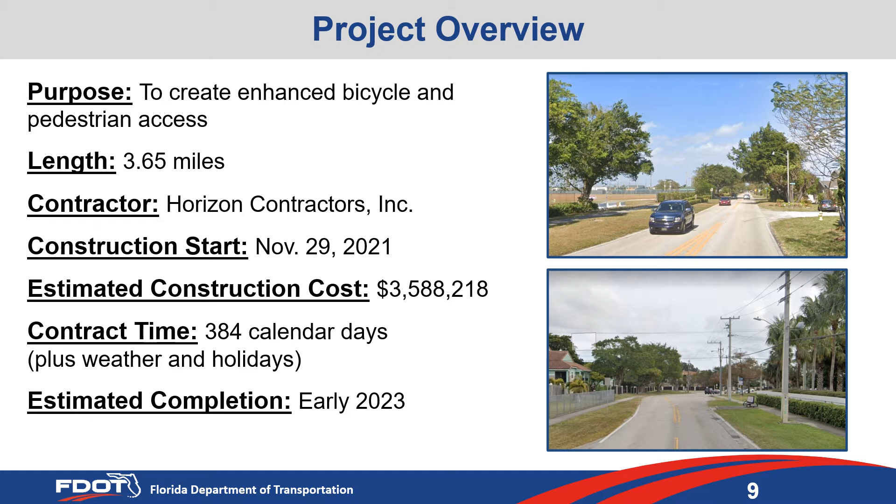Slide 10. Good evening, everyone. My name is Fazil Qureshi from the Broward MPO. I'm the Mobility Projects Manager.

First, I'm going to start off with who the Broward MPO is. We are a federally chartered entity responsible for transportation decision-making in the Broward region. We help influence the expenditure of federal and state transportation funds at the regional level. We are governed by our MPO board, which consists of 31 elected officials from 31 municipalities, from Broward County School Board, and the South Florida Regional Transportation Authority, also known as Tri-Rail.

We help ensure that plans are developed, we conduct studies, we establish initiatives and programs. Our vision is to collaboratively plan, prioritize, and fund the delivery of diverse transportation options, ensuring our work will have measurable positive impact by ensuring transportation projects are well selected, funded, and delivered.

Slide 11. Now, many of you may be wondering, where did this project originate from? This project actually came out of the Broward MPO's Hollywood and Pines Boulevard Congestion Management and Livability Planning Study. The study was completed in December of 2013.

The study was a half-mile wide corridor centered around Hollywood Pines Boulevard from US 27 on the western end to State Road A1A on the eastern end.

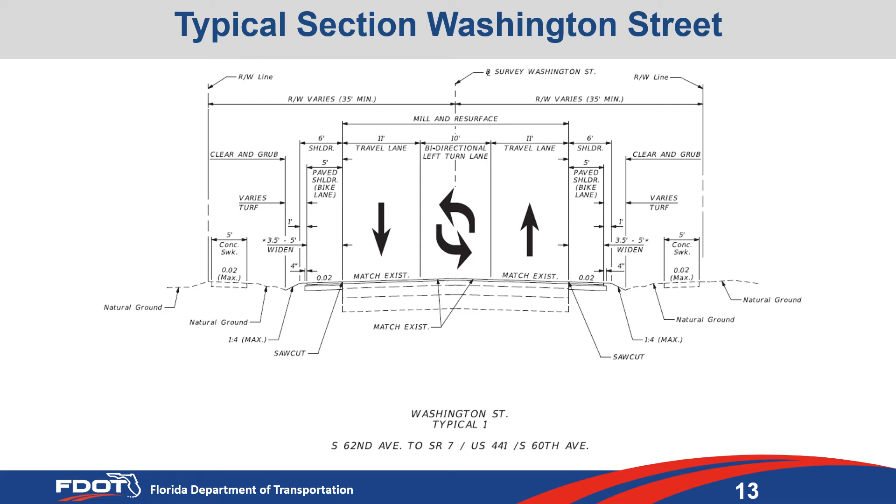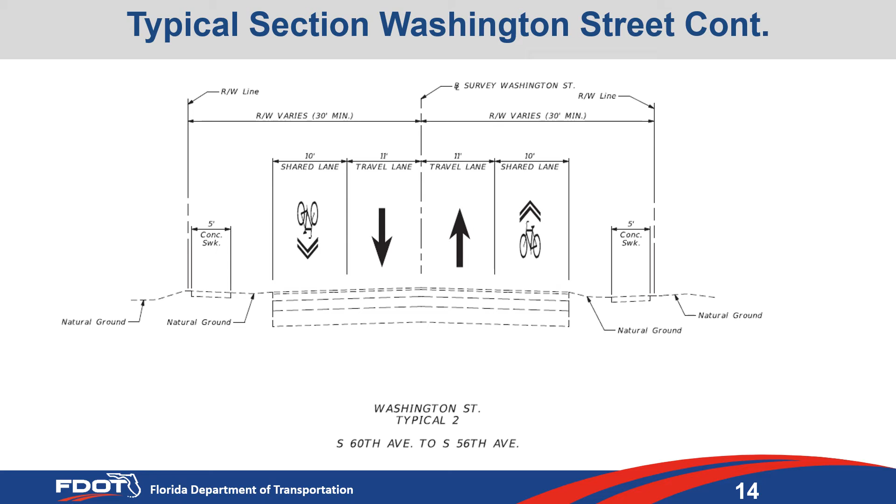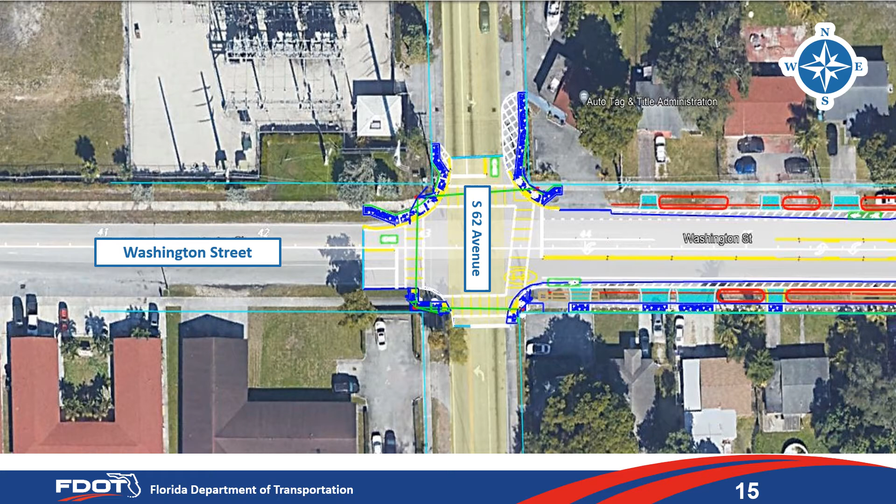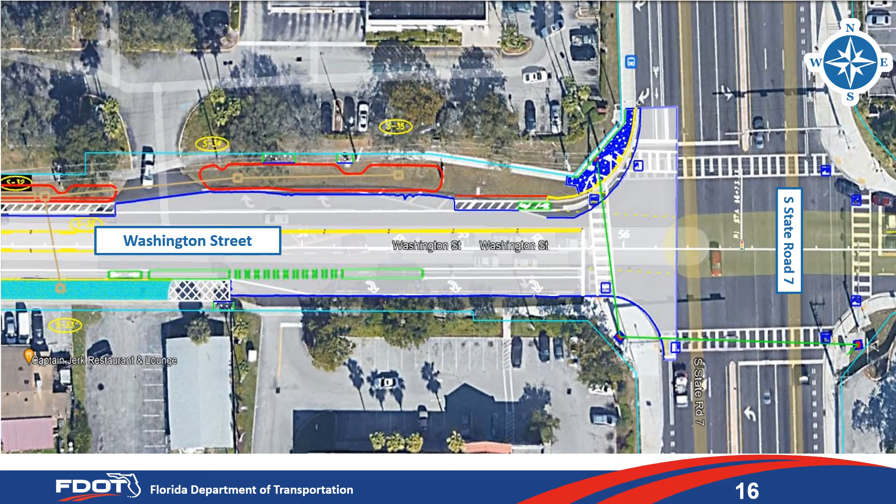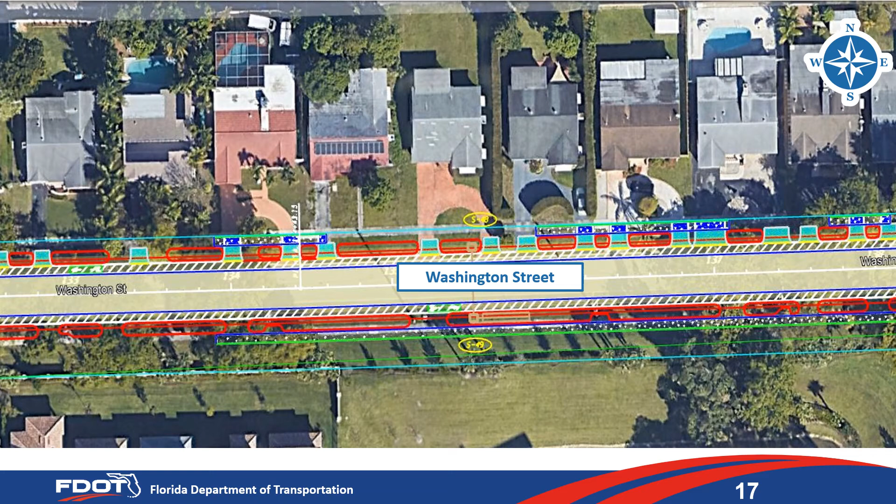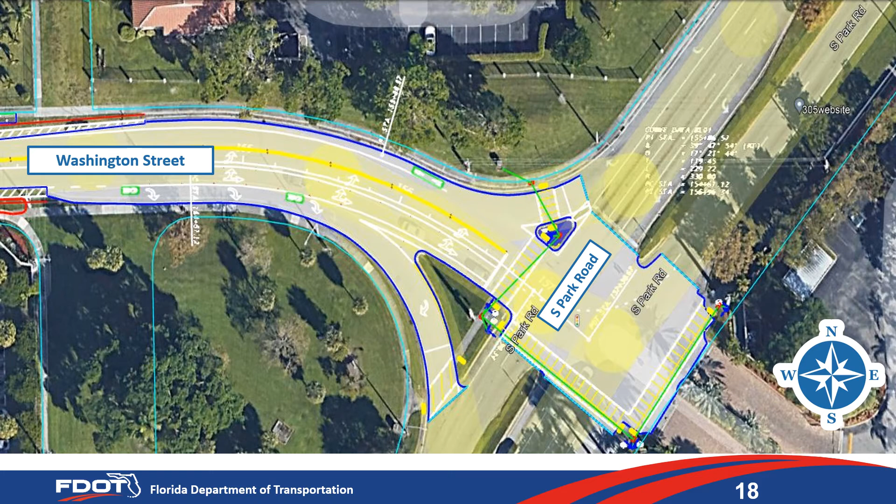Again, here you can see some of the striping that will be done after the milling and resurfacing at this intersection, as well as some pedestrian signal upgrades.

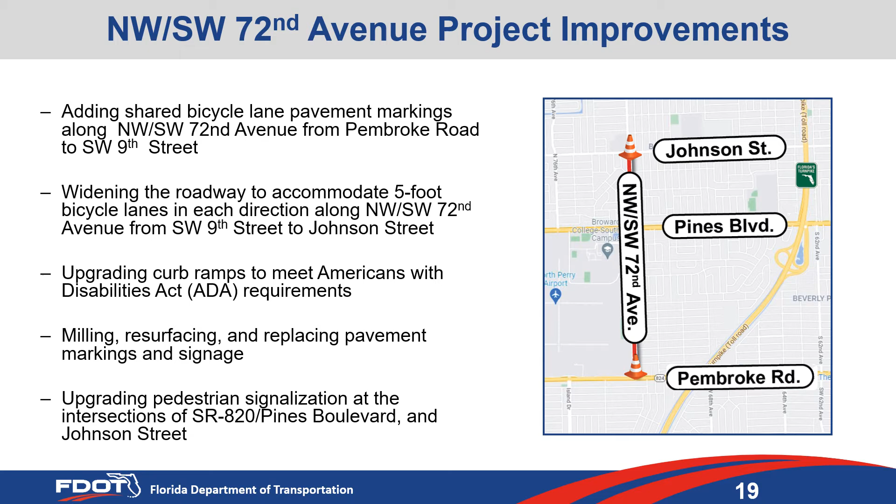Slide 20. This is the typical section of 72nd Avenue between Pembroke Road and Southwest 9th Street. We will be placing shared bicycle lane markings along this segment of the road, as it is anticipated to be reconstructed in the near future by Broward County Water and Sewer Department.

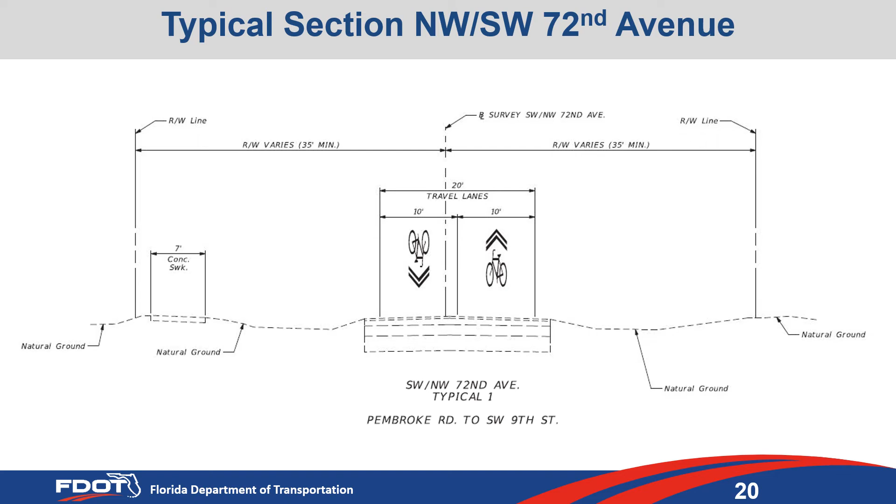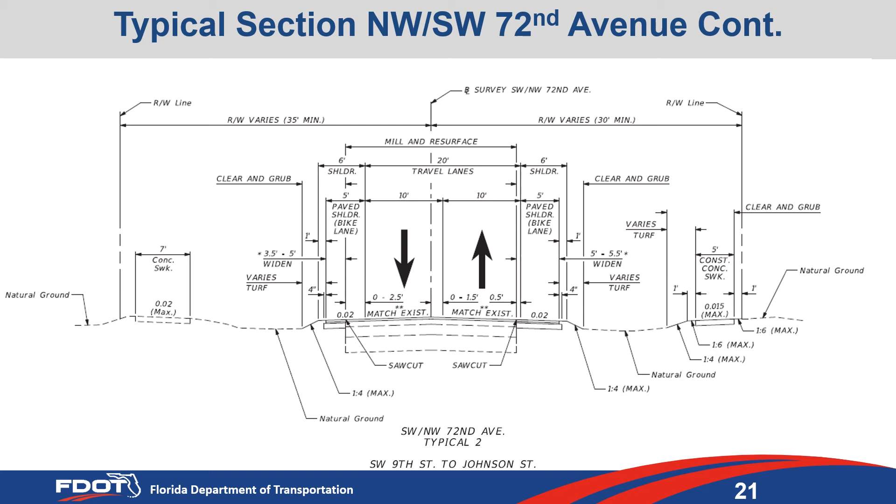Slide 21. This is the typical section of 72nd Avenue between Southwest 9th Street and Johnson Street. This typical section depicts the widening of the roadway shoulders to accommodate the future bike lanes. Also, the reconstruction of the sidewalk along the east side of the road.

Similar to the previous slide, the hash marks represent the areas of widening to accommodate the future bike lanes. In aqua, you see the driveways that will have to be rebuilt as part of this project. In red, you see areas of swales that will have to be regraded for drainage purposes, along with some of the drainage structures that will have to be installed.

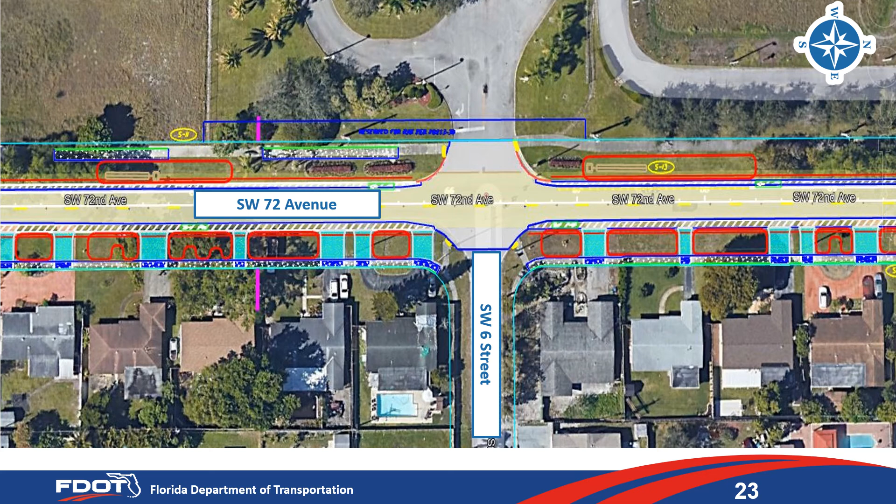Along the east side of the road, you see the sidewalk that will have to be reconstructed. Some of the sidewalk portions along the west side of the road will also have to be reconstructed. Slide 24. This is an overview of Southwest 72nd Avenue at Pines Boulevard.

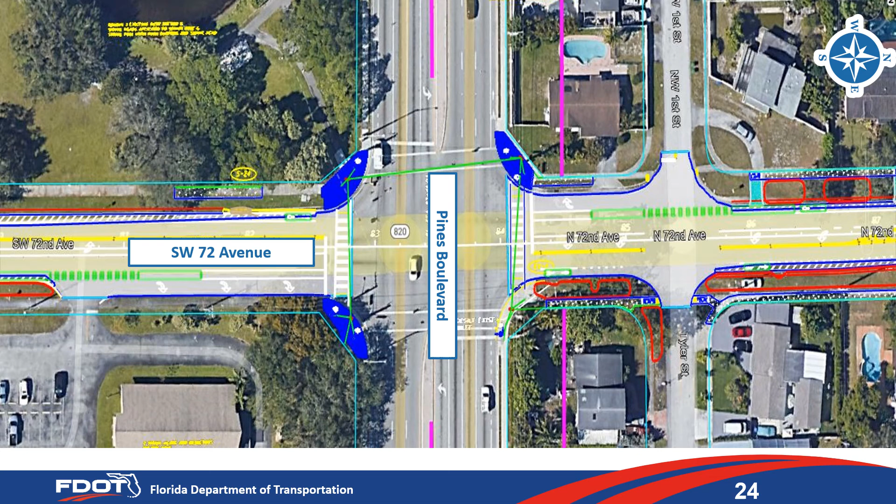The hatch marks represent the areas of widening to accommodate the future bike lanes. In red, the areas of swales that will have to be regraded for drainage purposes. Along the east side and west side of 72nd Avenue, just north of Pines Boulevard, sidewalks will be reconstructed as part of this project. At Pines Boulevard, we will perform signalization improvements for pedestrians.

Slide 25. This is an overview of 72nd Avenue at Johnson Street, which is the northern limit of our project. The hatch marks represent the areas of widening to accommodate the future bike lanes. In red, the areas of swales that will have to be regraded for drainage purposes.

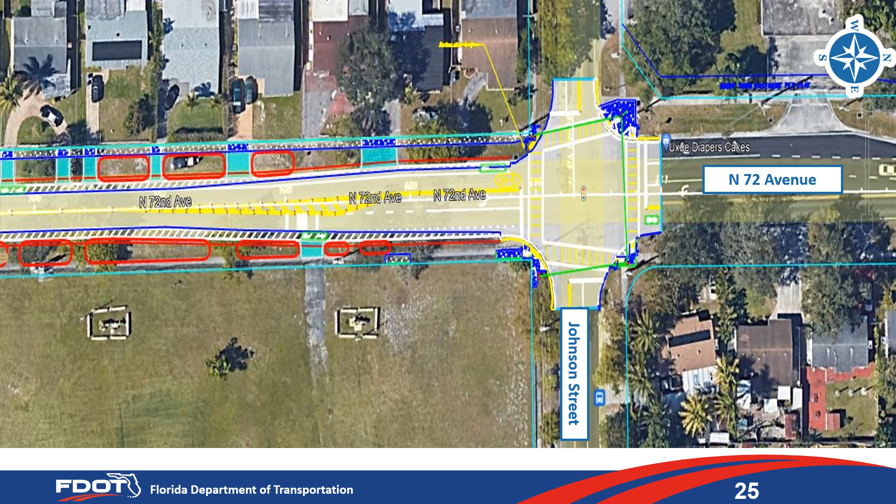In aqua, the driveways that will have to be reconstructed as part of this project. The sidewalk along the west side of 72nd Avenue will have to be reconstructed also. At the intersection of Johnson Street, we will be performing signalization improvements for pedestrians.

Slide 26. Public safety is our top priority. Work zone signage is placed throughout the construction corridor. Lighted message boards will be located at the northern, southern, eastern, and western of the project limits.

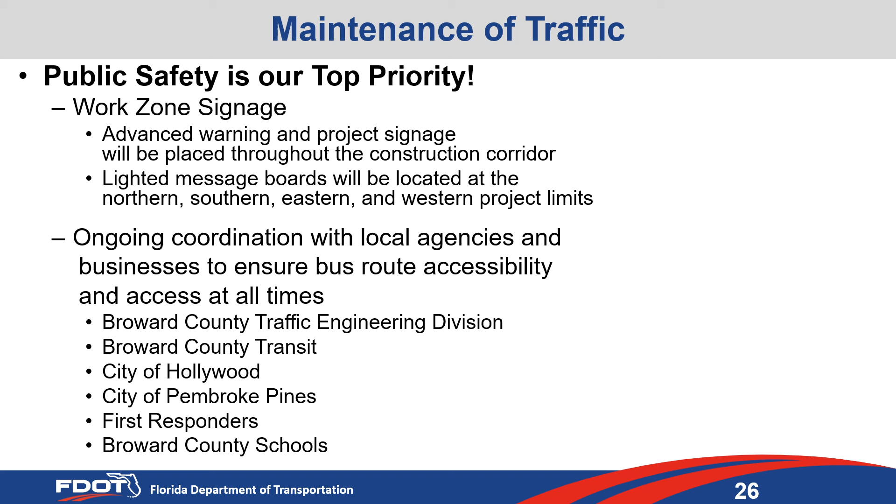Ongoing coordination with local agencies and businesses to ensure bus route accessibility and access at all times. Some of these agencies that we're coordinating with include Broward County Traffic Engineering Division, Broward County Transit, the City of Hollywood, the City of Pembroke Pines, first responders, and Broward County Schools.